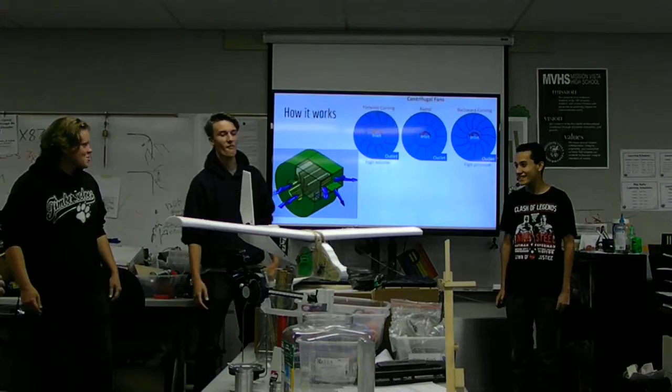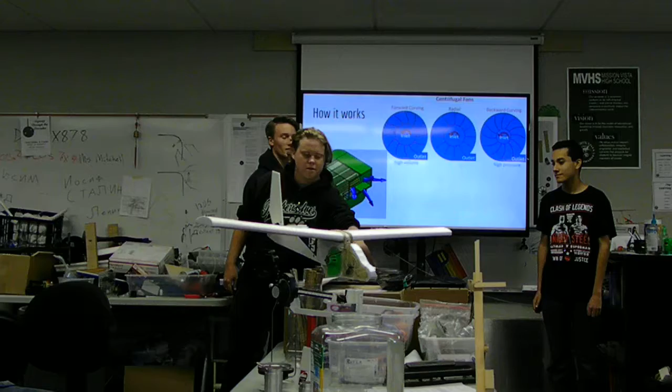Alright, so this is our centrifugal fan plane by Luke and Alex. The first thing we went about was the whole motor component, because we wanted to go with a centrifugal fan. There were a lot of challenges to go with it because it's not as efficient as a regular fan blade or anything else.

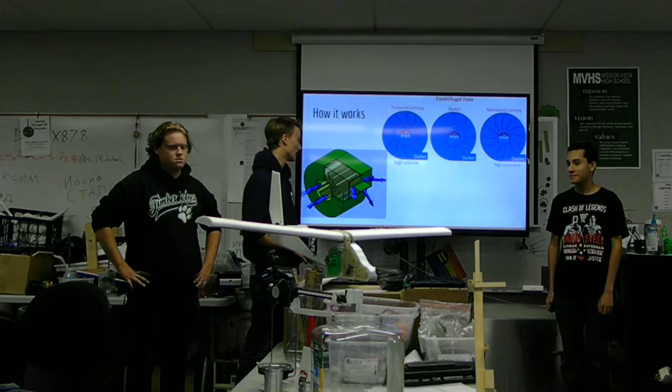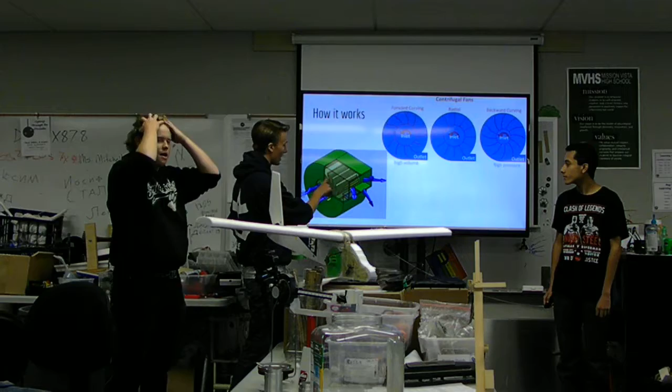So basically how this works is it's kind of like a cylinder funnel in a way, and the air intake comes through here, it sucks it up through, and then as it goes around it exits here. So this was one of the models we ended up printing with the motor mount on the side.

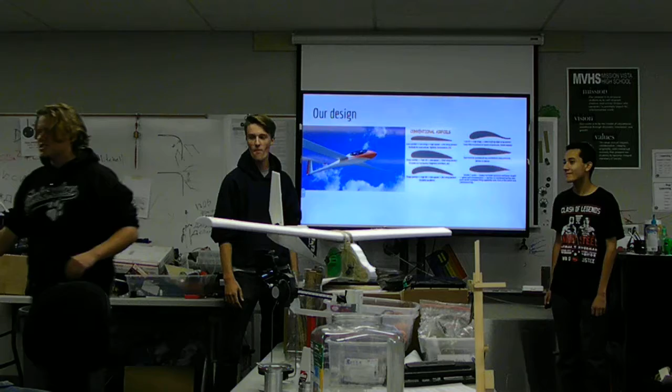Okay, so we went through a lot of process to make these wings. We kind of messed up once, so we got an extra wing. But we started with templates. We had to remake these a couple times because Sammy kept making them not the right size and having holes in the top, so we'd have to put tape over it and stuff like that. And we finally got it to a point where we really liked it, and we put it on, and it didn't quite come out of the foam, so our wings kind of got a flat top a little bit.

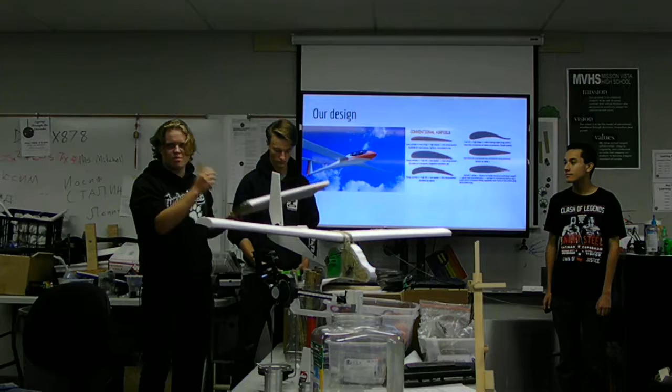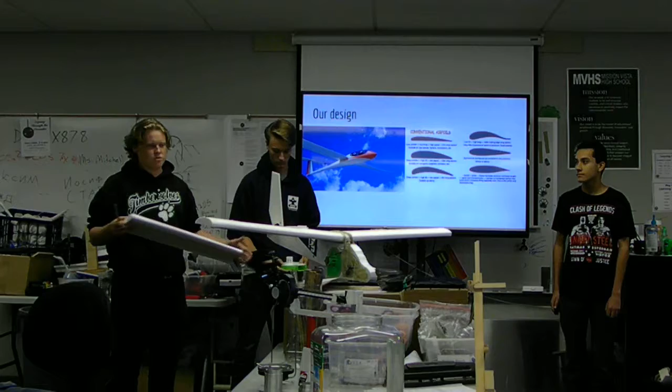That's okay. We have to make it with a pretty good amount of camber underneath because the centrifugal fan is going to be so heavy. The wings would have to be pretty big and cambered to create enough lift to help it stay in the air as best as possible. So it has to kind of be like a glider in that aspect.

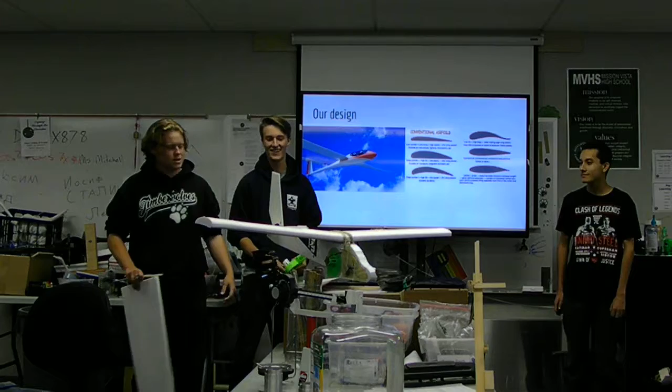We originally made this thicker. I made it. I thought it was pretty great. And Luke was like, no, I don't like it. So he made it thinner. He remade it himself.

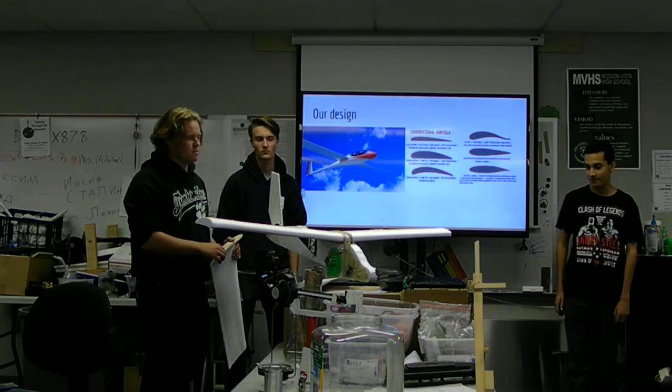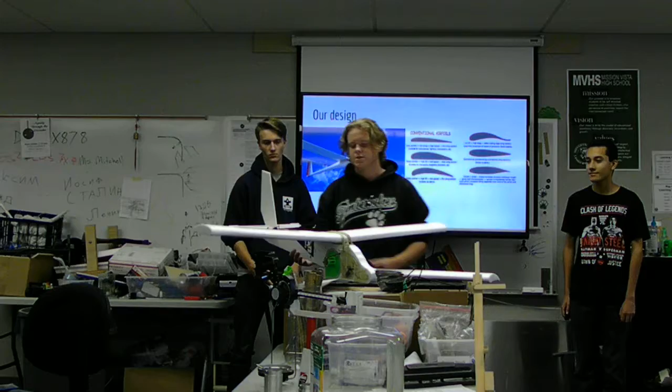The ailerons were a bit hard to make, to put the iron on and everything, and the cutouts. And then it's really long, which we like, because it offers nice lift in the tail. We called it the dragonfly because of the shape. Kind of looks like a dragonfly.

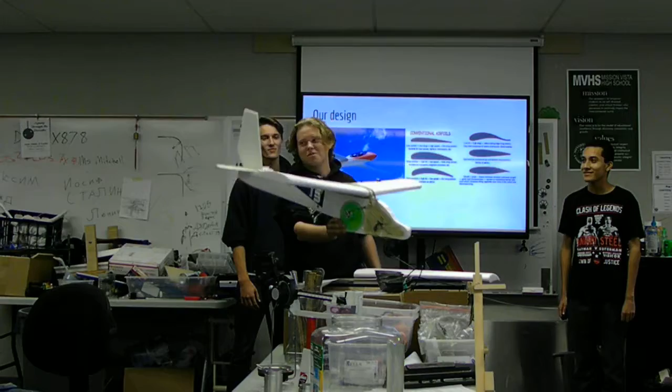Yeah. Hey! You'll find out. Yeah, that's pretty much it for that.

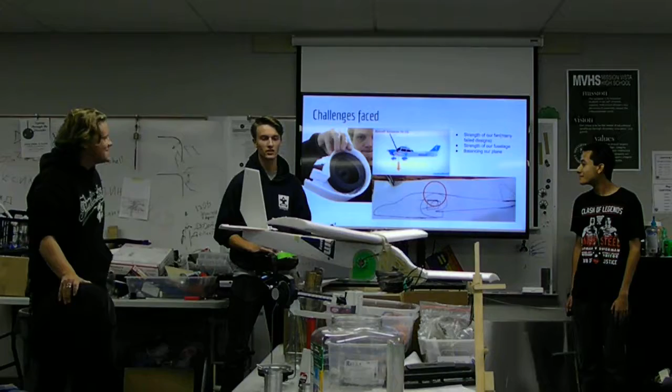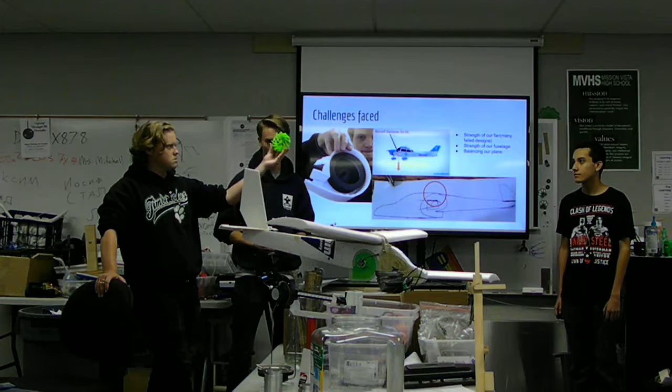Alright, and one of the largest challenges we faced was the motor system. Because we didn't have a pre-made one we could work with, we had to 3D print everything. So we printed a total of like 2 complete ones and 3 fan blades. One of the first problems we had was this wasn't structurally sound. We didn't print it thick enough. So when we got to higher RPMs, one of the blades here broke off.

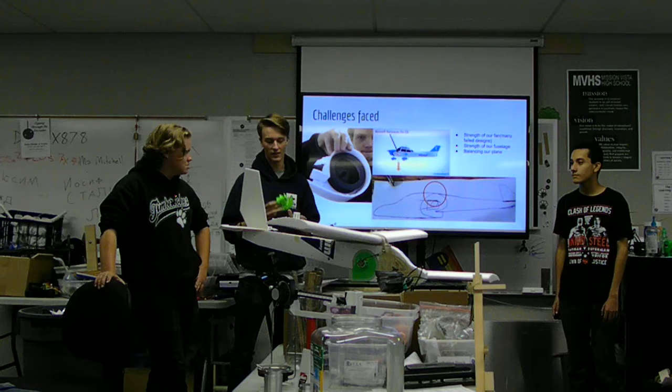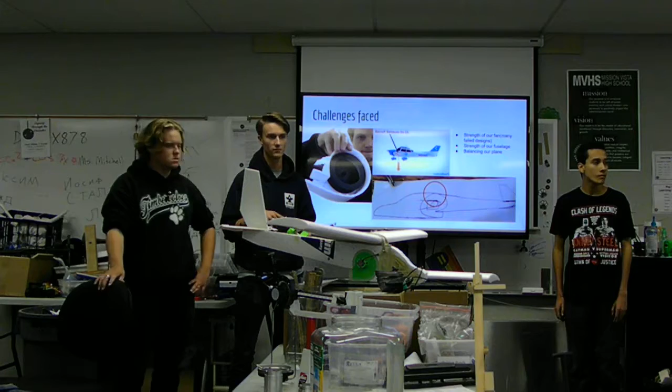And also as it would spin, it would expand, and the blades would kind of flare out a little bit. So our first solution for that was 3D printing another ring to glue on top of it. And it worked, but it wasn't as good as it could be. So on our second one, we decided to go a little bit lighter and just wrap string around it, so that it was lighter weight, thinner, and didn't really affect the height of it at all.

And then the second problem we had was that this was actually rubbing quite a bit on it. So it ended up having balancing problems because 3D printing isn't exactly perfect. So it's almost like balancing a fan. It was kind of hit and miss. I took clay and put it on a blade and tried it out to see if it was better or worse, and then went around and ultimately ended up putting glue on the ones that needed more weight. So the one we have in it now is pretty balanced.

And the other problem we had was that this was too close to here. It needed more clearance. So we had to push it out more. We had to actually retract this part more, so that the motor would push itself out. And then we actually ended up going too far. So we ended up printing a little spacer plate to get it just right. So it's pretty close to dead center in the new box we have.

And then one of the other challenges we had was the structural integrity, because we have a heavy motor mount. We were originally going to do a 2-part design, but decided that was too weak, so we ended up with what we have now, where we made it a little bit thicker. But we were still nervous about that, so we ended up putting runners on it to beef it up a little bit.

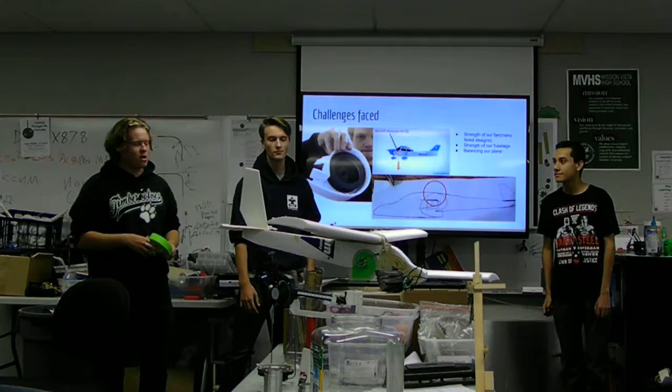We also had a plan B, where if anything happened, we just punch out the centrifugal fan, shove in a piece of foam, and then strap a little propeller to the front. That's the final plan, though, just in case.

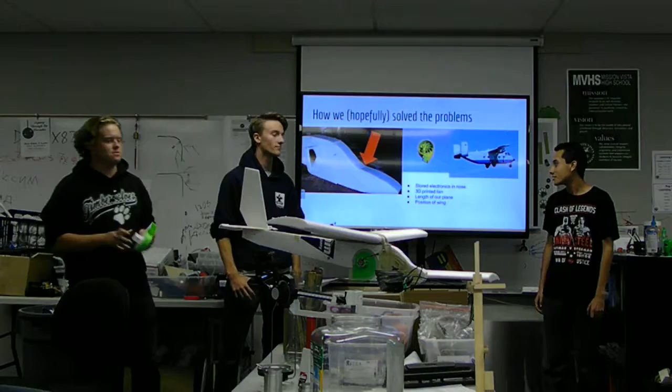How we hopefully solved the problems we already said: we stored a lot of the electronics in the nose of the plane to keep the weight in the front rather than the back. We 3D printed the fan because originally we were going to have the case of the fan made out of foam, but that was too much of a hassle, so we 3D printed the entire case. And there was no way we could mount a solid motor mount to it without it being kind of sketchy.

And the length of our plane was changed because we had to balance it, like Luke said, so we made it shorter. And the position of the wing is weird because we wanted it to be strong right above the motor, the fan, but we also wanted it to be functional. That's it.